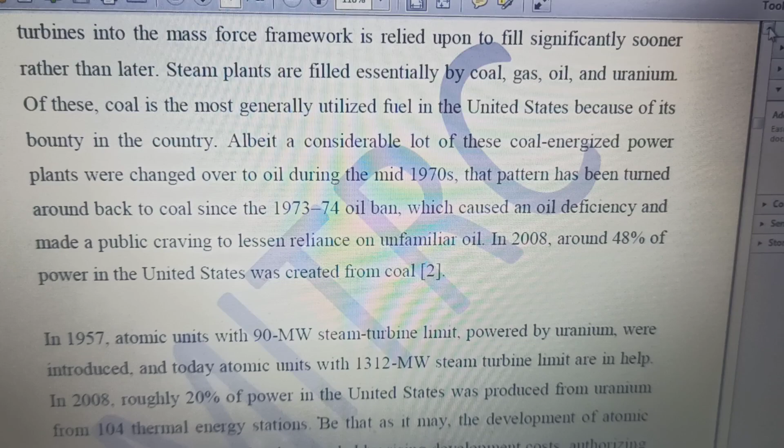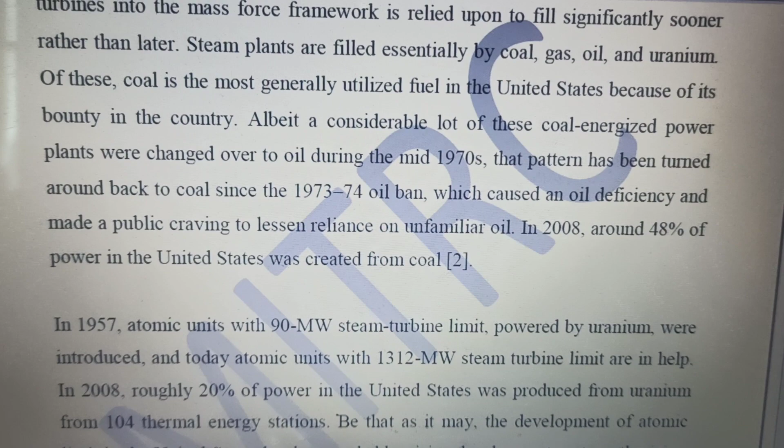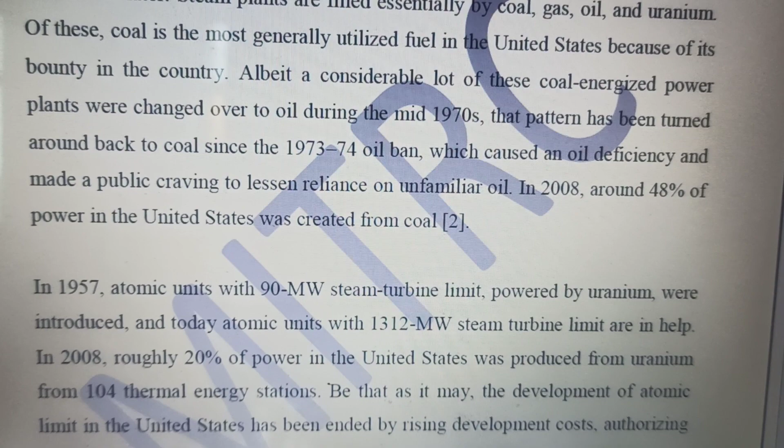We will be continuing from the last lecture where we discussed the development of the power system, and exactly how the resources, the availability of different resources, led to different means of power production.

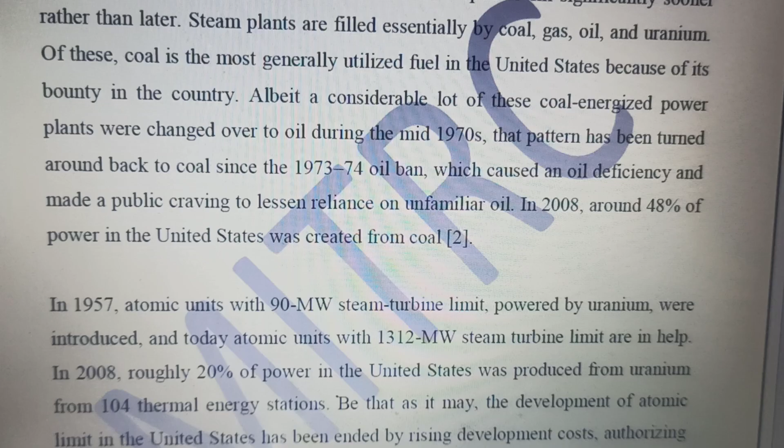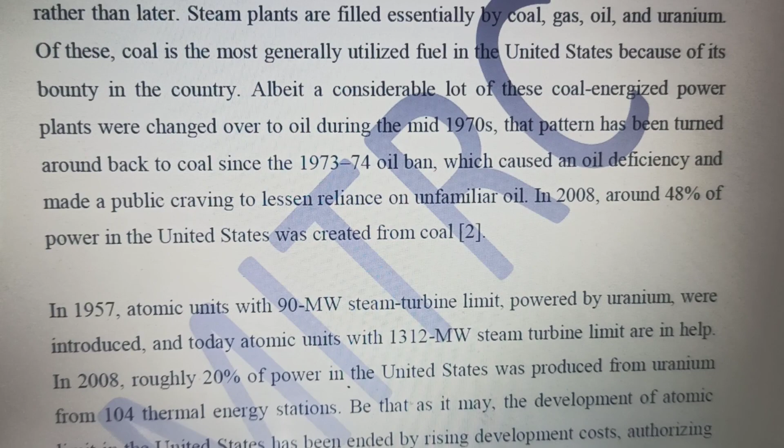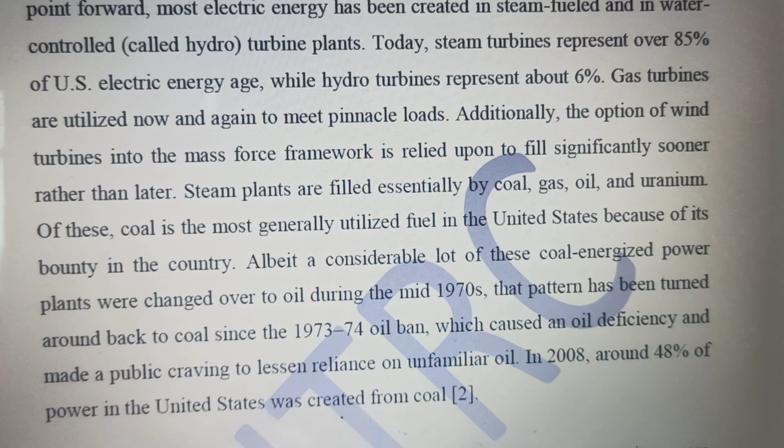Now take the example of coal. As I had already discussed, steam turbines are generating 85% of power in America.

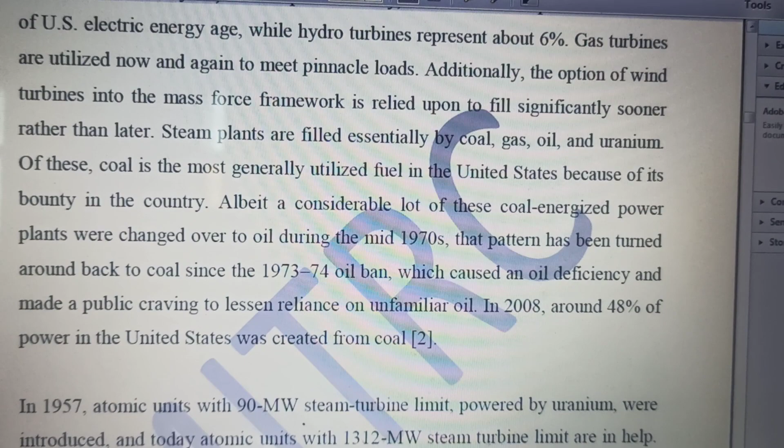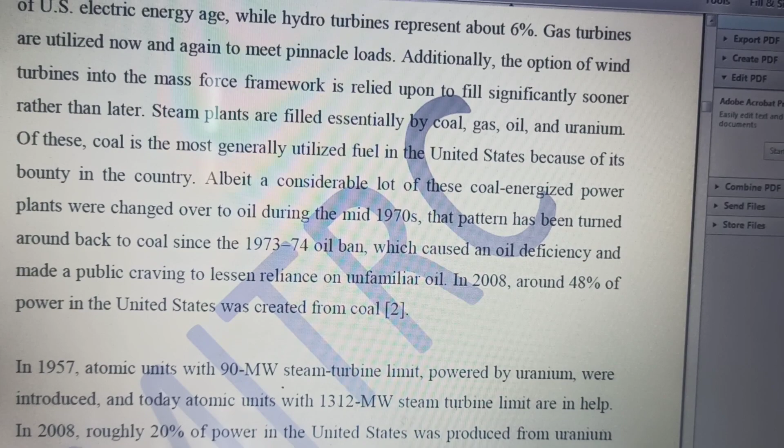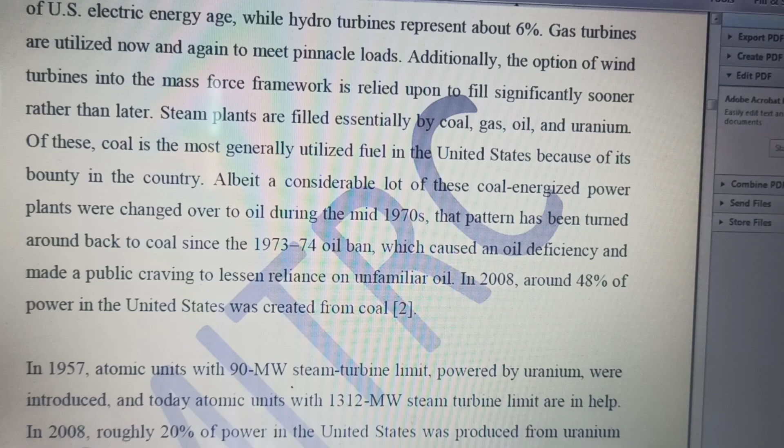A significant change was obtained in mid 1970s when coal-energized power plants were changed to oil. It means the energy that we were obtaining from coal, we started to obtain from oil. But in the mid 70s, there was an oil ban, and that led to a deficiency of oil.

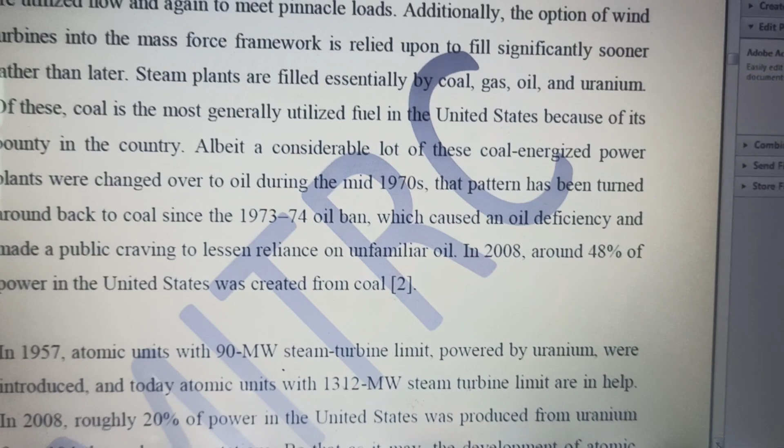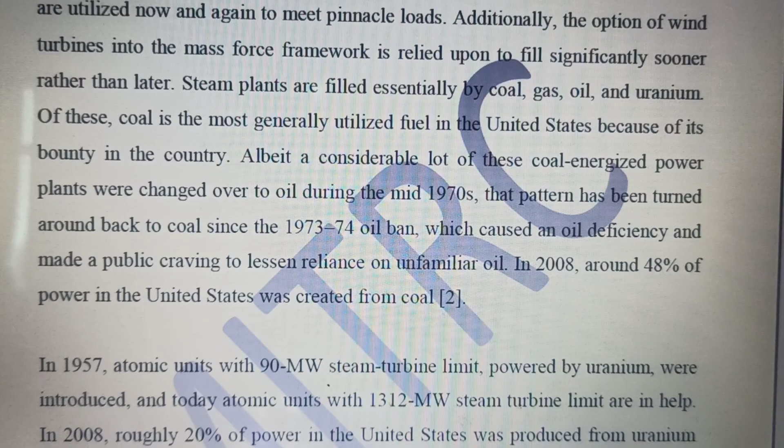This led to a decrement in the reliance of the public on oil. Right now the condition is that around 45 to 48% of the total power in the United States is being created from coal. Is it clear? Yes, I think it is quite clear.

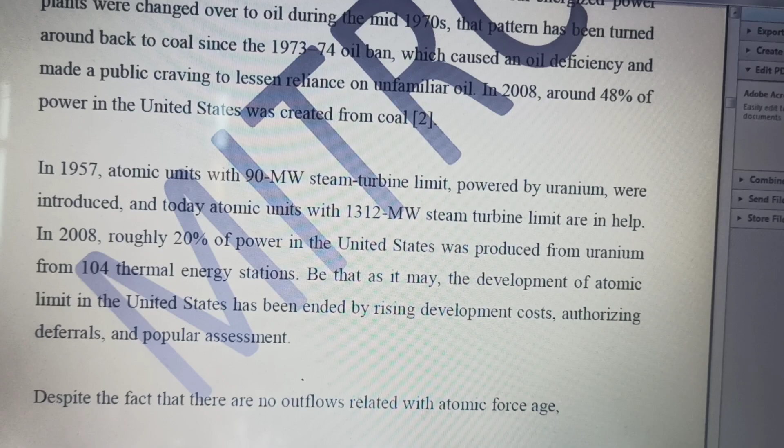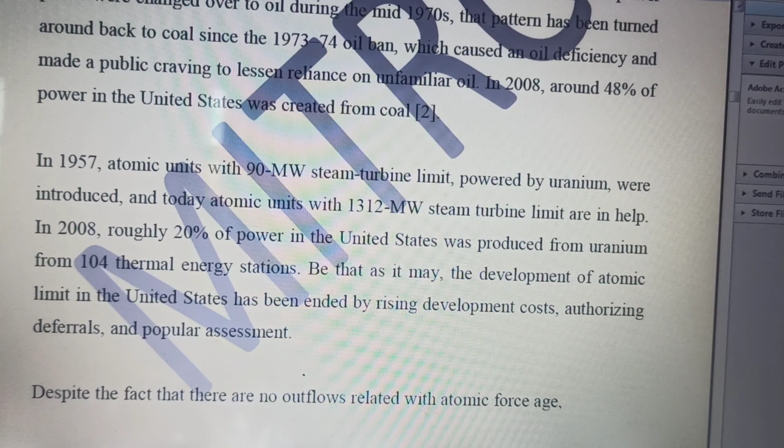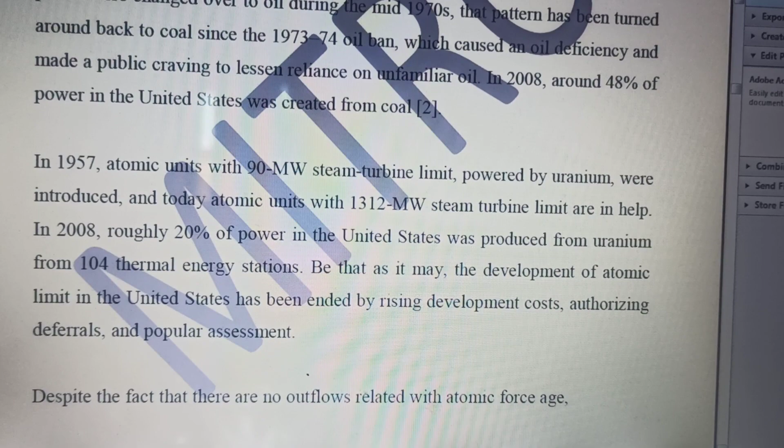Also, it's a very important part that many people are saying that we should rely on nuclear power, we should depend on nuclear power. But it is a very important fact that, till 2008, only 20% of the power developed in the United States was being produced from uranium.

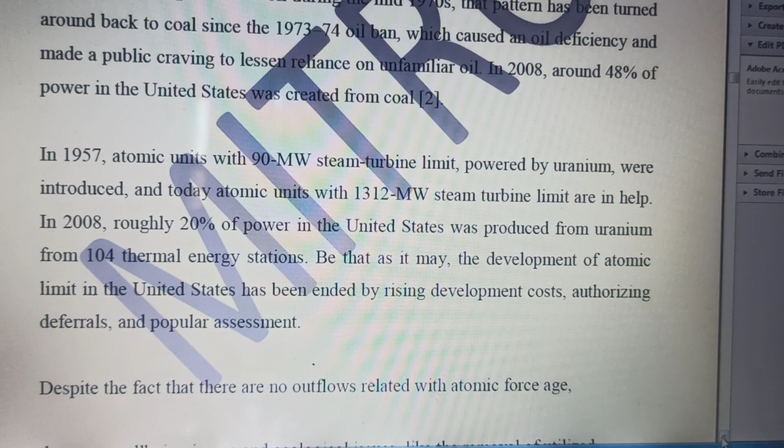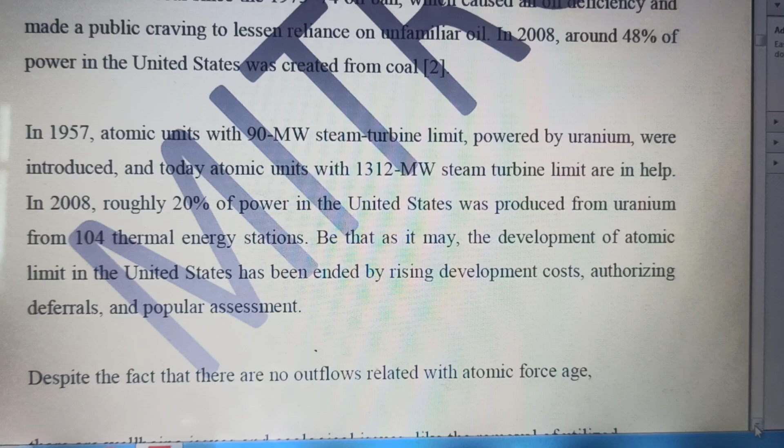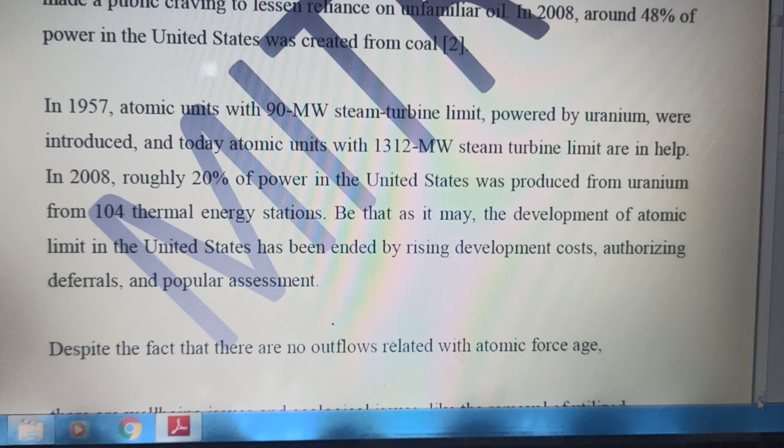Why? And it has only 104 thermal energy stations. It means that the development of atomic limit in the United States has been ended. Yes, now there is no development in the atomic limit in the United States, and it's all because of the rise in developmental cost, and authorizing deferrals.

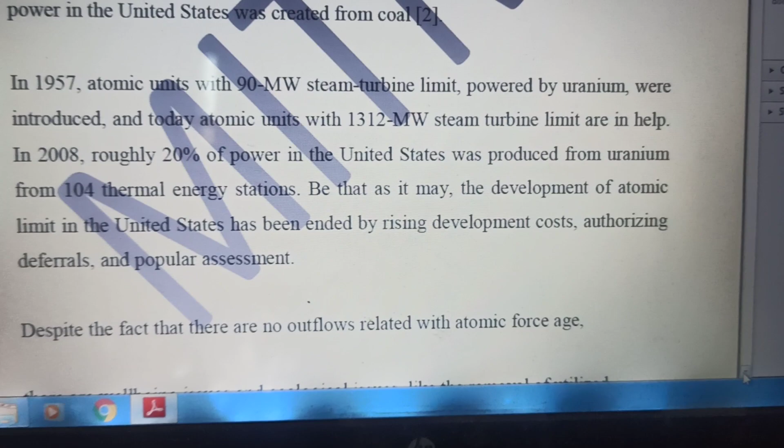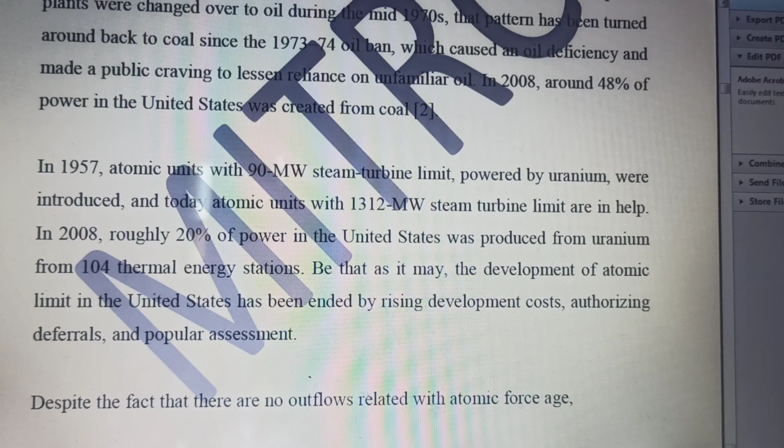And what people have perceived is that nuclear power can be trusted, but sometimes even if a 2% break in trust happens, then it can lead to deleterious outcomes.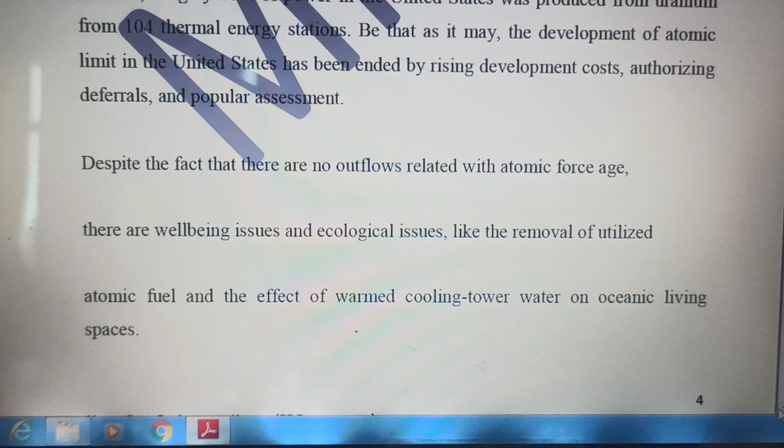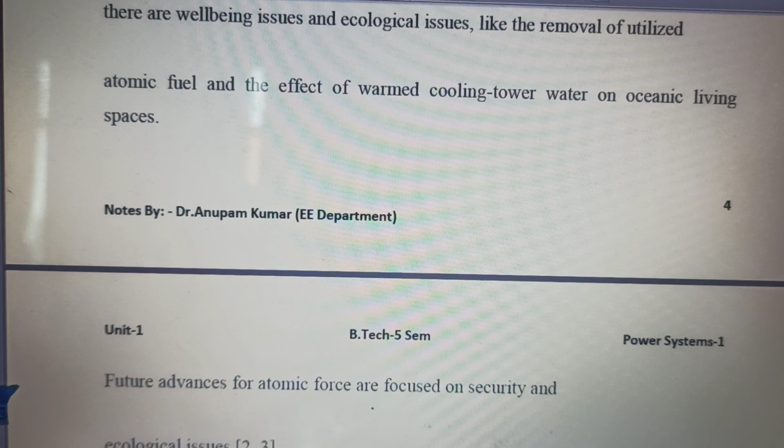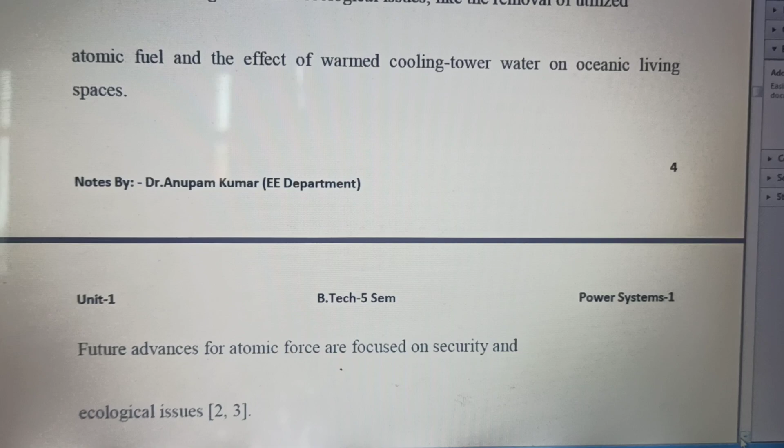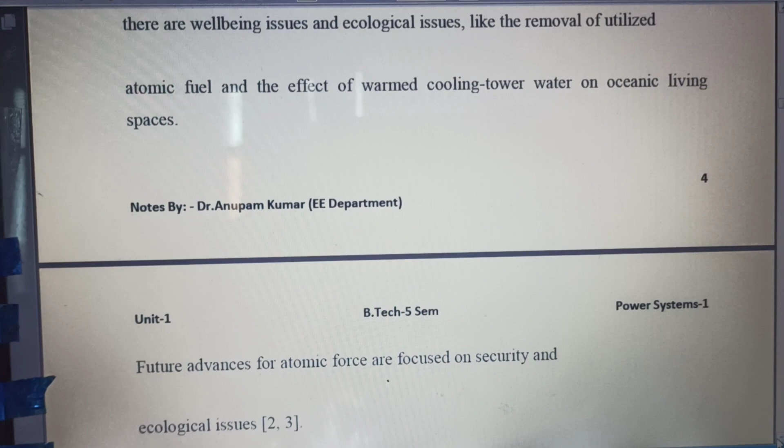Now, another very important thing is that a large amount of heat is generated from atomic fuels, and that's a fact. So how are we going to use this large amount of heat? What is the solution to this? The solution resides because this water, the cooling tower, is cooled with the help of water, and this hot water can cause damage to oceanic living species.

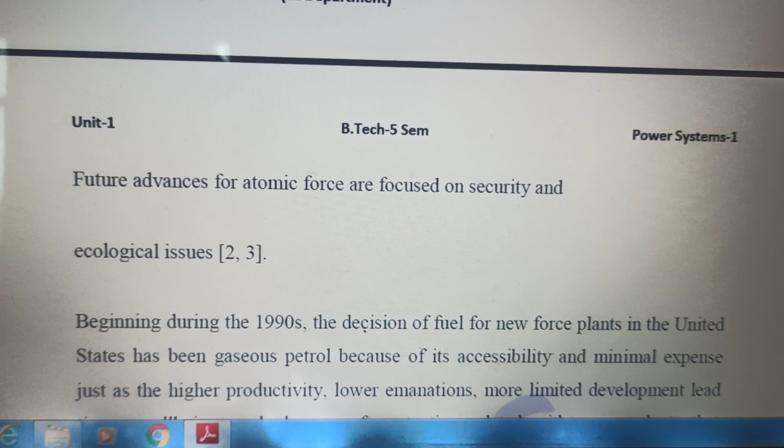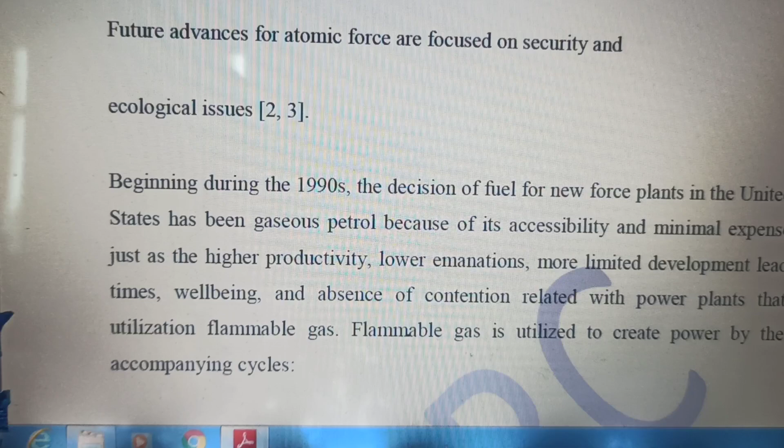I think till this part it's quite clear. Now, because of security and ecological issues, the advances in the field of atomic forces are restricted.

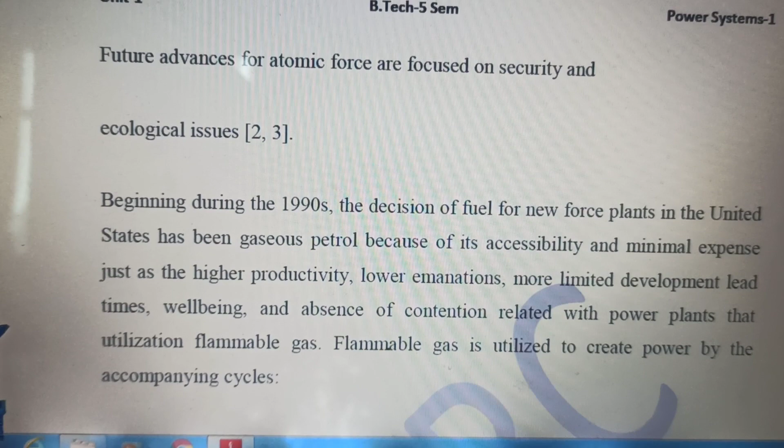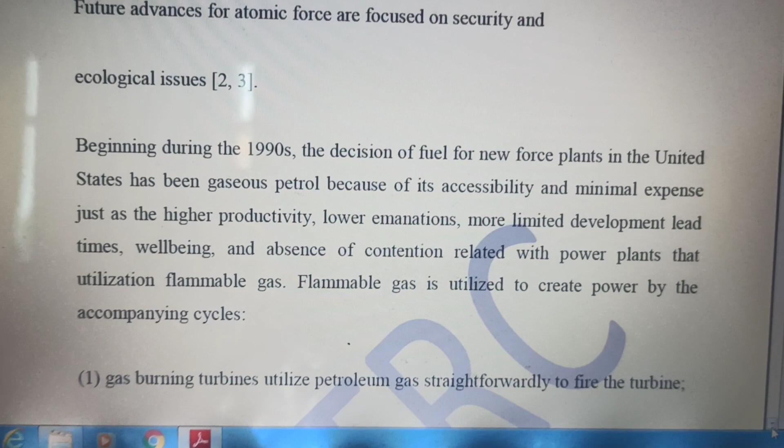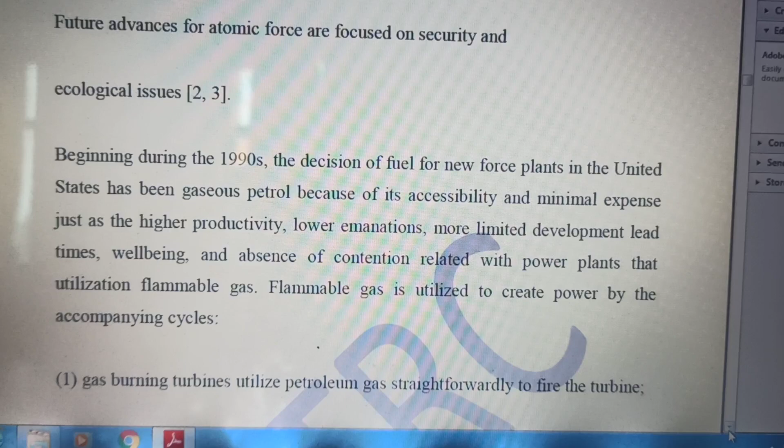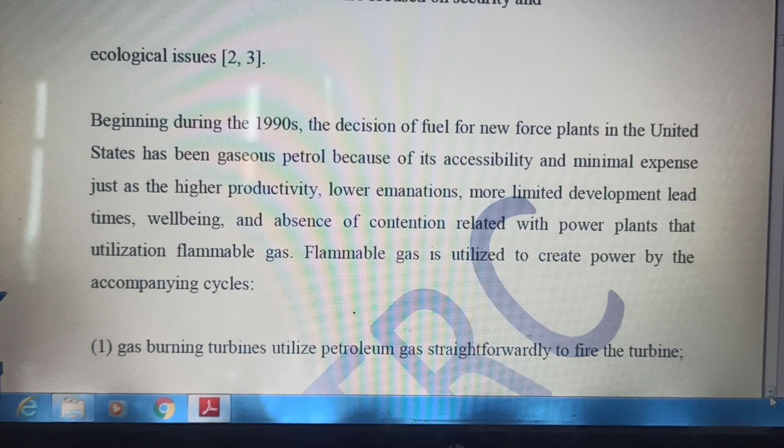Now comes the gaseous petrol into the picture. Because the expense is very minimum, productivity is higher, emanations are lower, and these fuel plants can be developed in a very short span of time.

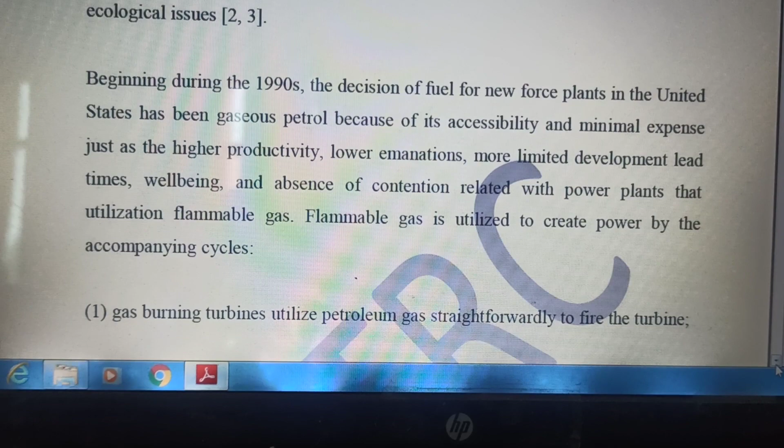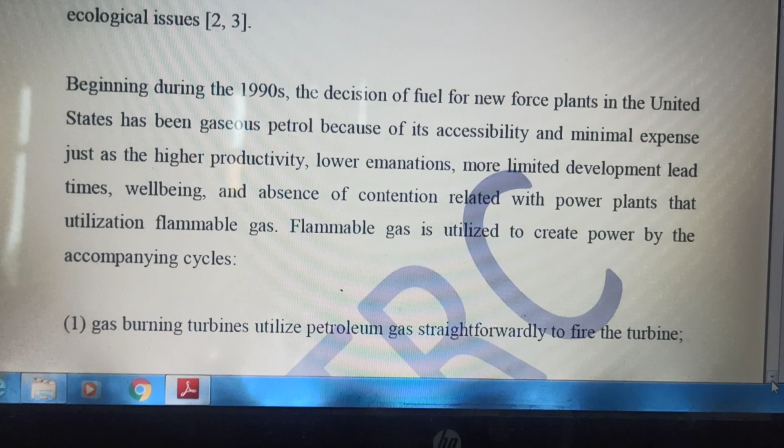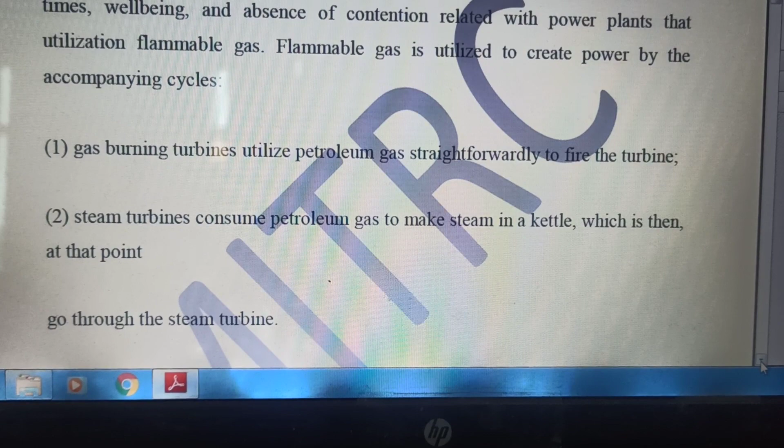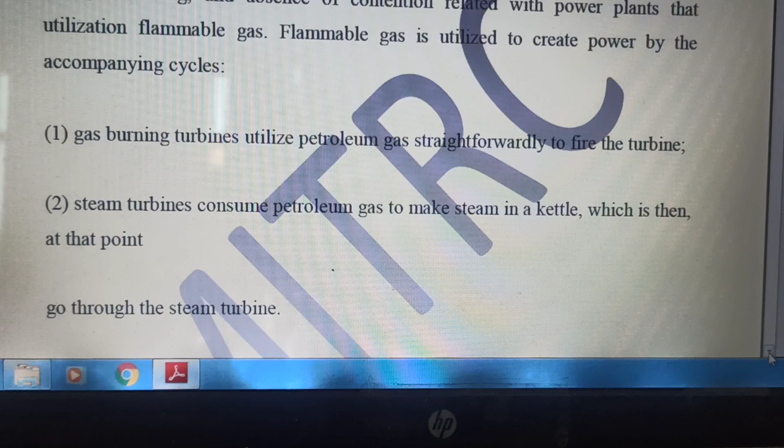After that, how a flammable gas can be utilized is again discussed. So, turbines which move on gas - it means the vanes of the turbines are moved with the help of gas. Basically the petroleum gas is burnt and that gas is used for the rotation of the turbine.

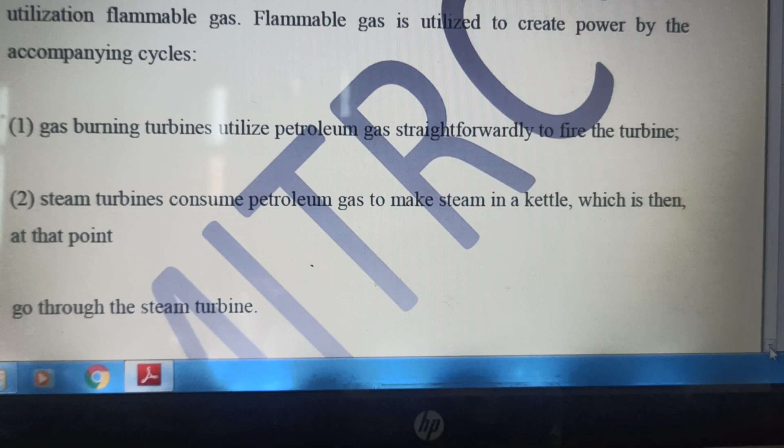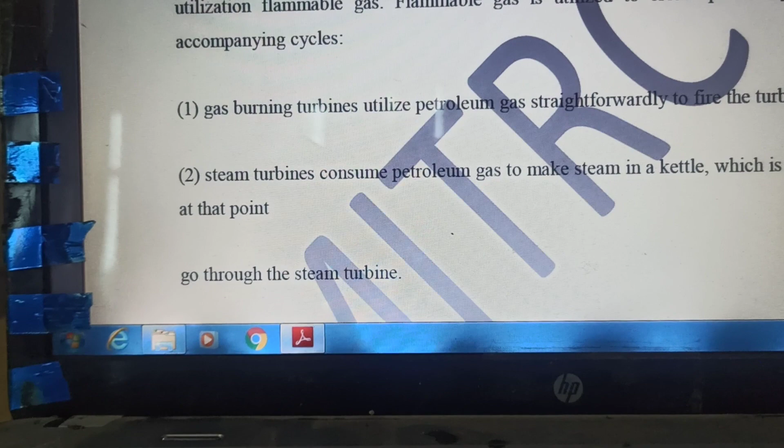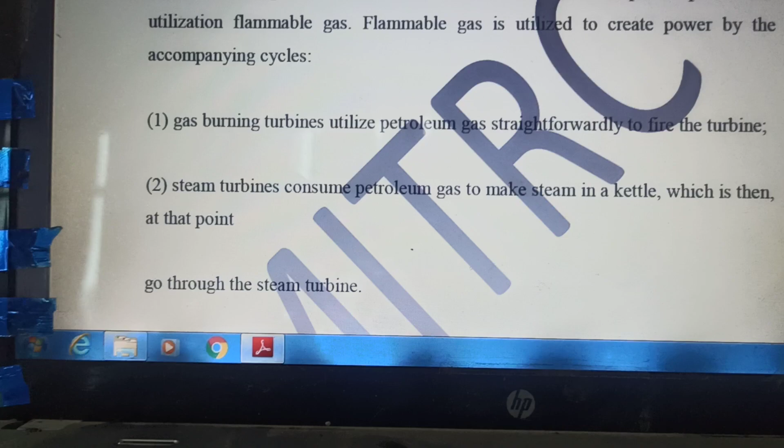In the case of steam turbines, petroleum gas is consumed to make steam in a kettle, and it is not a small kettle, it is a big kettle, and then that steam is sent through the steam turbine.

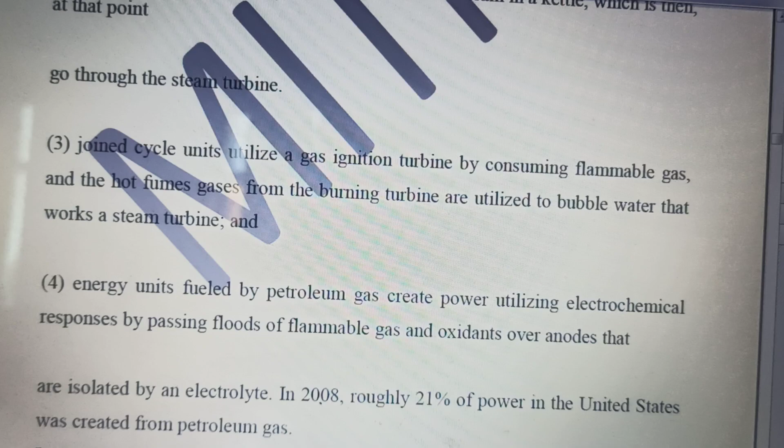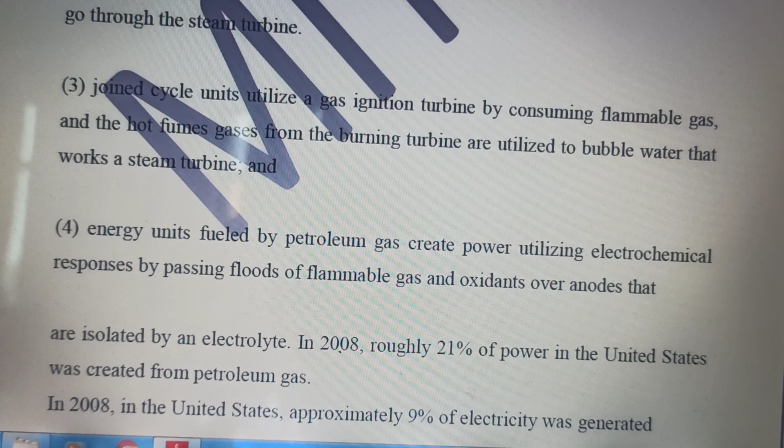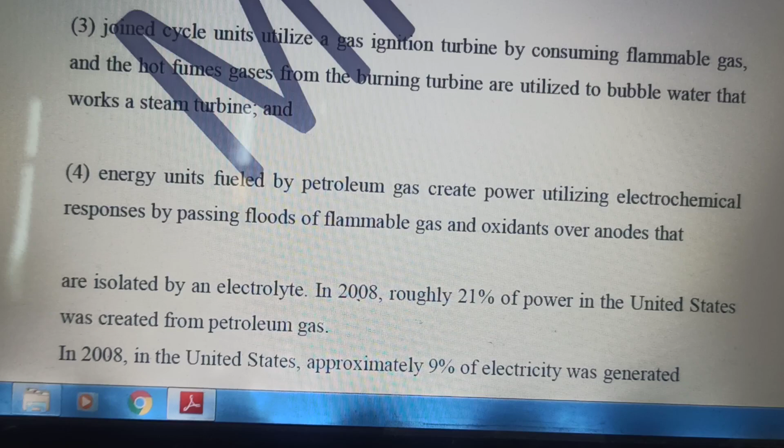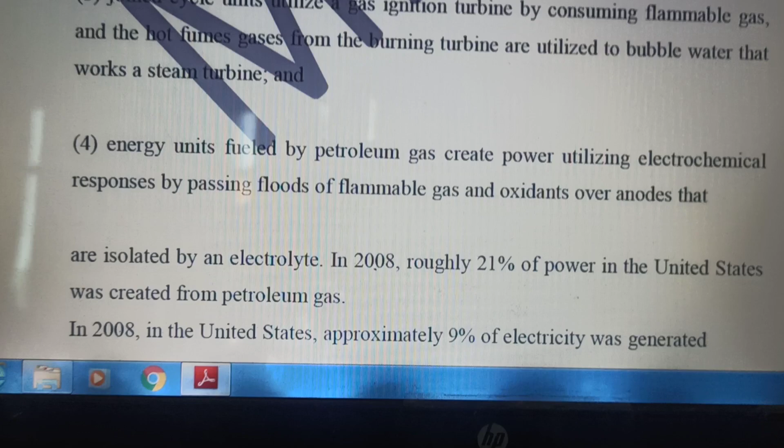After that, energy units which are fueled by petroleum gases create power with the help of electrochemical responses, and 21% of power is being created from petroleum gas. So we can come to a very important conclusion that in the most developed nation, America, the percentage share of petroleum gas power is more than the atomic power.

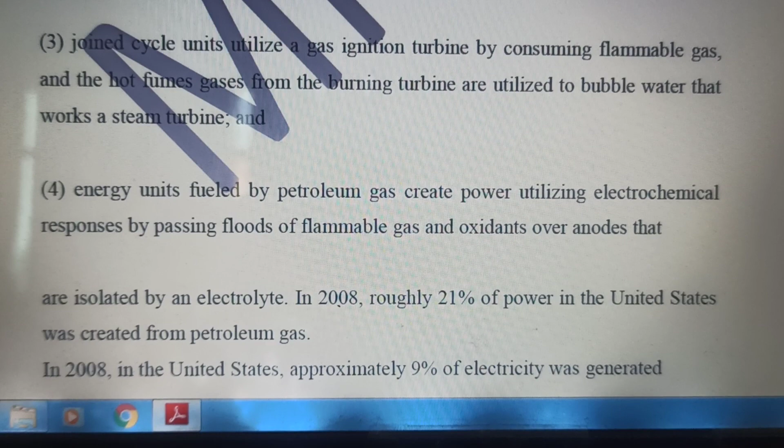So it is a hot topic of debate that how on earth we, which is still a developing nation, are going to rely on nuclear fuels. Yes, it is very hazardous, we can't rely on nuclear fuel. I think this is quite clear.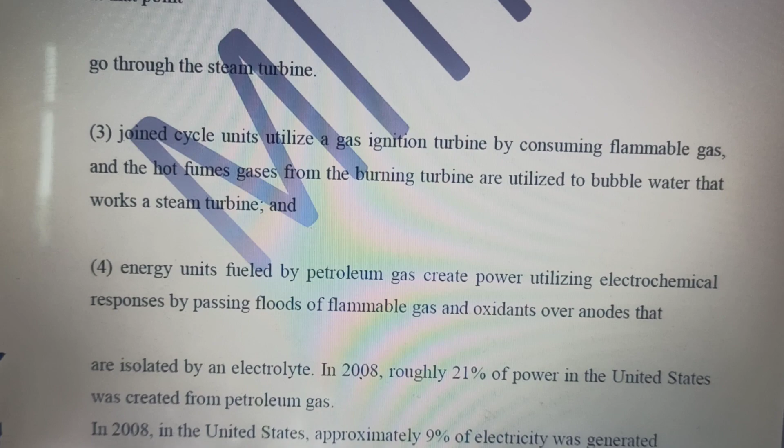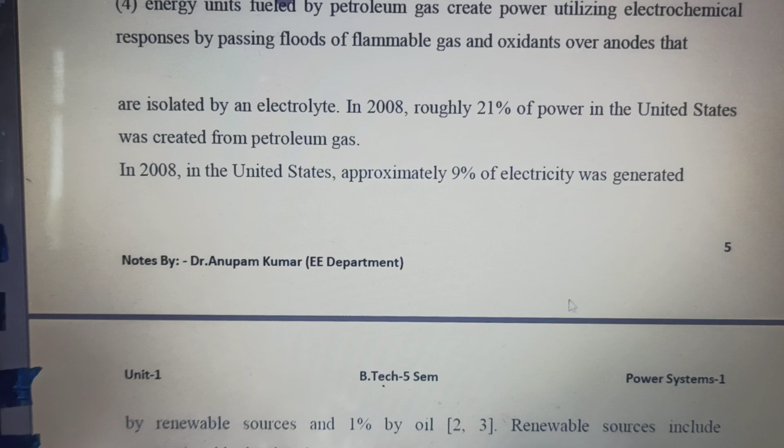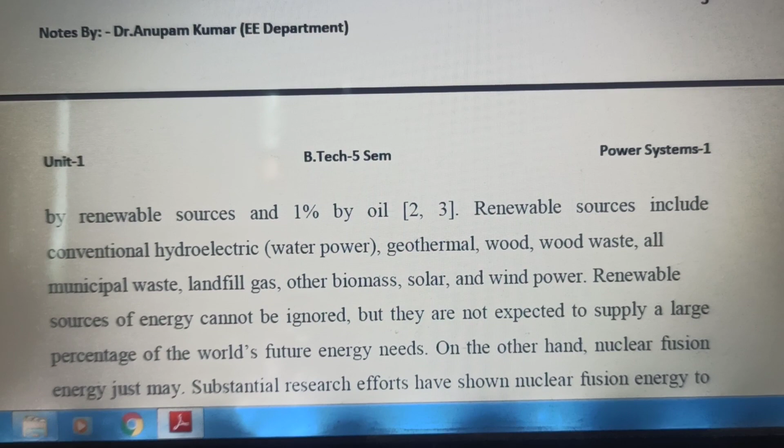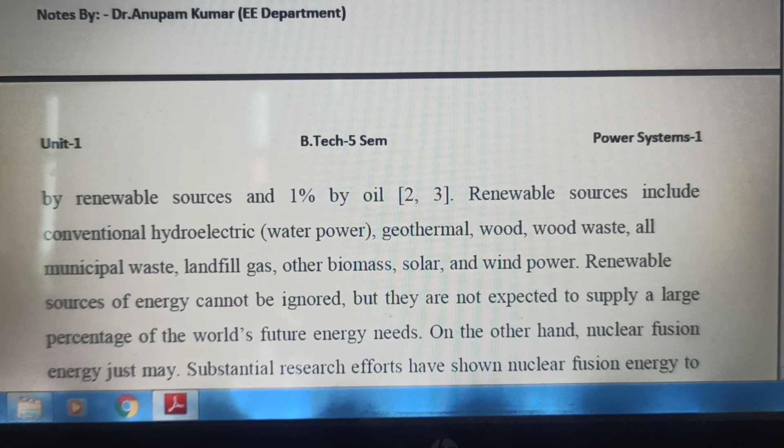So I would like to review what we have learned till this point. A very important point is here. Only 9% of electricity is being generated by renewable sources, and 1% by oil. Renewable sources include conventional hydroelectric, geothermal, wood waste, municipal waste, landfill gas, all these things - all combined only contribute to 9% of power.